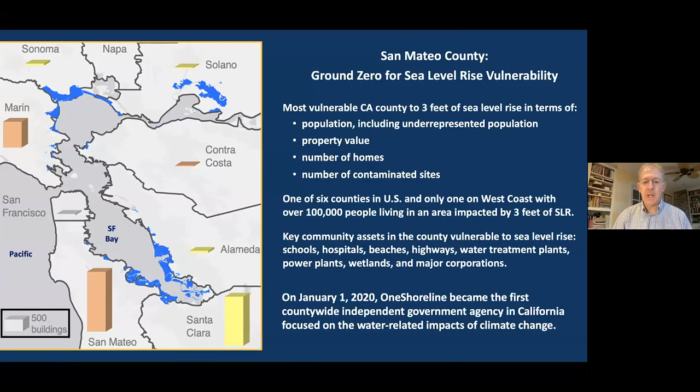I'll point out two specific projects briefly. San Francisco Airport, a major facility, has great vulnerabilities. They've had a project called their Shoreline Protection Project in planning and early design for years. They're now doing their environmental documents, CEQA documents here in California, and NEPA on the national level.

They have an area of their shoreline that they want to tie into the cities to the south and to the north, these yellow dashed lines. That would obviate the need for them to do this long stretch along the airport in terms of creating a perimeter of protection for them.

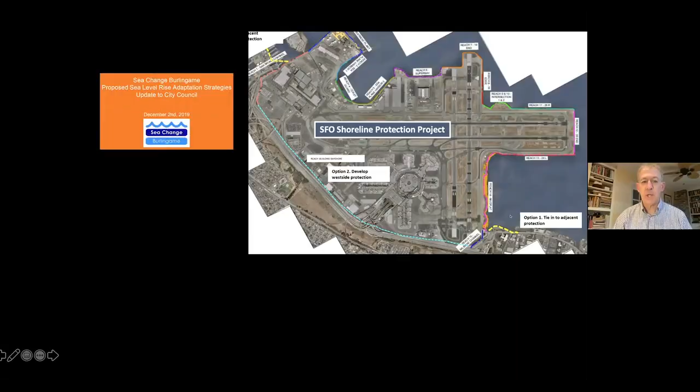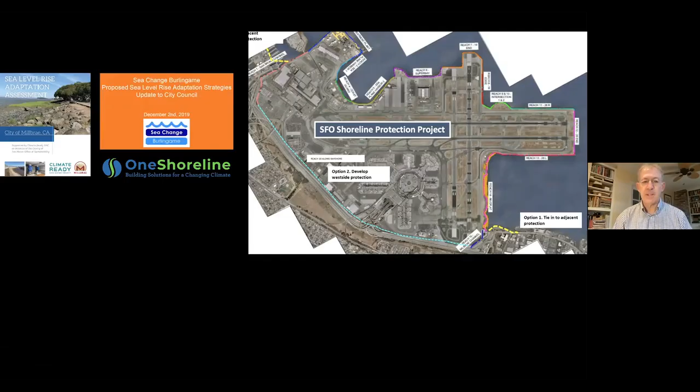Meanwhile, the cities to the south, Burlingame and Millbrae, separately did studies on their sea level rise concerns in late 2019, early 2020. They all came to our new district in January and said we should align our protection so that it's consistent and connected between our entities. That's really why our agency was created.

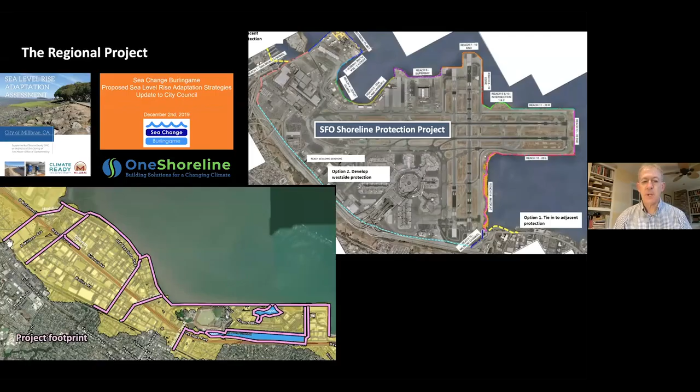So we've established a regional project, not just on the shoreline, but also the creeks that lead into it. Our sea level rise assumption is 6 feet above the 100-year tide, which is equal to 10 feet above today's high tide. So we're taking the long view on this and looking at the areas where the jurisdictions connect.

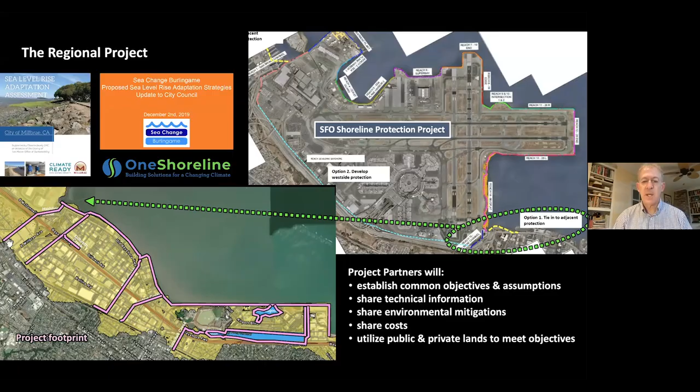The project partners share the assumptions, technical information, environmental mitigation costs, and utilize each other's property jurisdictional rights. We're also looking at the zoning and planning of the cities, and we're working with one of these two cities called Burlingame to put sea level rise for the first time in the San Francisco Bay Area into a zoning ordinance.

That zoning ordinance was discussed Monday night of this week, and it's planned to be approved by the city council in early December. We have six other cities we're working with now, establishing this same program as Burlingame, so that sea level rise is part of their general plans, specific plans, and zoning ordinances. Finally, I want to add there's a project on the coast we're looking at in Pillar Point, and the reason I mention this relates to the next speaker.

Just yesterday, we heard there was a federal interest determination to look at the harbor area along the Pacific coastline. There's a harbor district called the Pillar Point Harbor. They have a couple of harbors, on the bay side and here on the coast side.

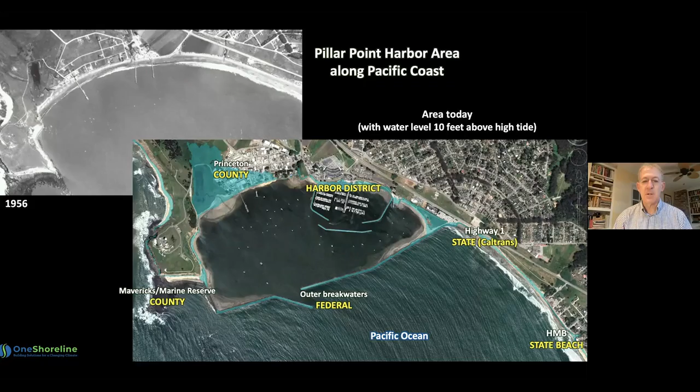There are federal facilities, these breakwaters. There's a county area of homes and businesses. There's State Highway 1, which is a hugely important asset to the area, and there are state beaches. So there's all these different jurisdictions, and our agency is bringing them together to take a long-term view, because each of these different levels, federal, state, county, harbor district, were looking at their own vulnerabilities and not the overall picture and how development over the decades has influenced their vulnerability.

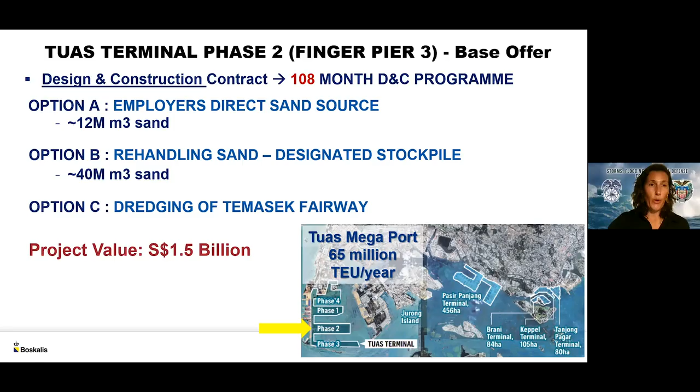It's designed and constructed by three parties in a joint venture, an integrated, fully integrated joint venture: Penta Ocean Construction, a leading Japanese marine infrastructure company, Hyundai Engineering and Construction - many in the States know them for cars, the automobile industry, but their engineering and construction wing is not too shabby either, they're probably one of the leading design and constructors of concrete products internationally - and Boskalis. The caissons are a specialty of Hyundai and Boskalis.

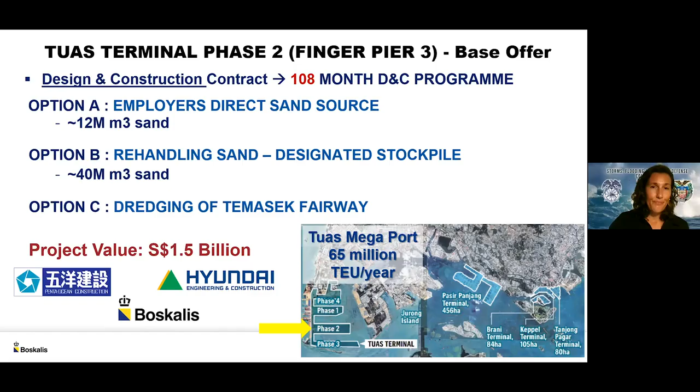So what is this project? It consists of 125 million cubic meters of fill material to reclaim around 366 hectares of new land. What you see here in blue is everything to be dredged, and this dredge material is all used directly as fill for this new land development. The brownish, greenish area is the reclamation area.

This is something slightly larger than Central Park in New York - I think Central Park is around 340 hectares, and this is 366 hectares of new land. The caissons themselves, of which there are 227 to build the 9-kilometer long wharf line, are constructed directly on site in the pink area, the caisson casting yard facility.

We're also building the last stretch of the 2.2 kilometers of the Tuas Boulevard extension, which is the main roadway connecting the different terminals within the megaport. The soil improvement area includes the new land as well as the existing land, so it's around 400 hectares. For reference, that's basically 400 soccer pitches.

There's lots of design and engineering work for this project. It would take me a very long time to go through all of it, but I wanted to focus on a few elements that give a good flavor - not just of the methods we're employing, which are environmentally and socially cutting edge, but also the materials we're utilizing. So basically focusing on this circular building approach, the sustainable building methods, and also the requirements, the design objectives driving this process.

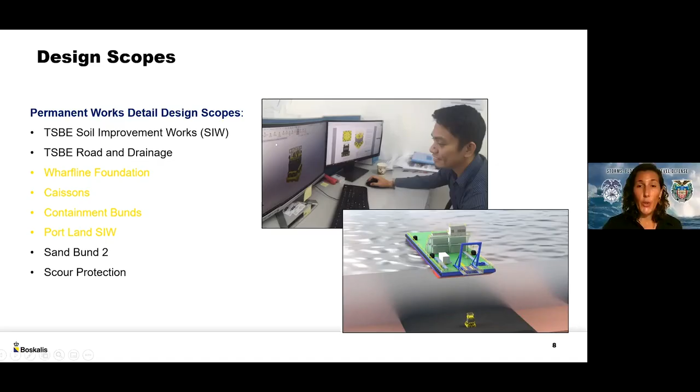I'm going to focus on the wharf line foundation, the caissons, the containment bunds, and the Port Land soil improvement works. Around the 9 kilometers of wharf line, we have a caisson wharf line, but sitting underneath the caissons, we build sand keys. We excavate the existing compressible clays down to competent incompressible clay.

We have a 60-meter wide base at the base of our sand key, and around 1-on-2 slopes going up. Our sand key depths range from 2 meters deep to around 40 meters deep, and then they're backfilled with sand.

To give a reference point, going back to New York, the Metropolitan Museum of Art is the largest art museum in the US. Its footprint is around the size of 8 soccer fields, and it's around 5 stories tall. You could fit 2 of the Metropolitan Museum of Art buildings on top of each other in our deepest sand key comfortably. Our deepest sand key is around 12 stories tall.

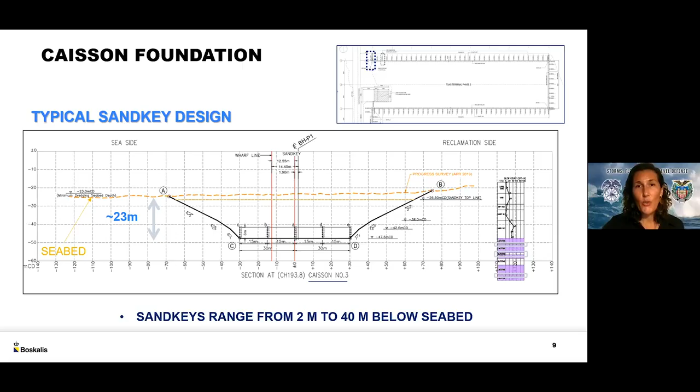This is then backfilled with sand and vibrocompacted to a relative density of 70%. On top of the sand key, we then build a rock mound, which is the direct foundation upon which the caissons are placed to a 10-centimeter accuracy. We then have a heel filter, which is also rock, and then a sand backfill. The active wedge in the sand backfill is also deep compacted using vibrocompaction techniques.

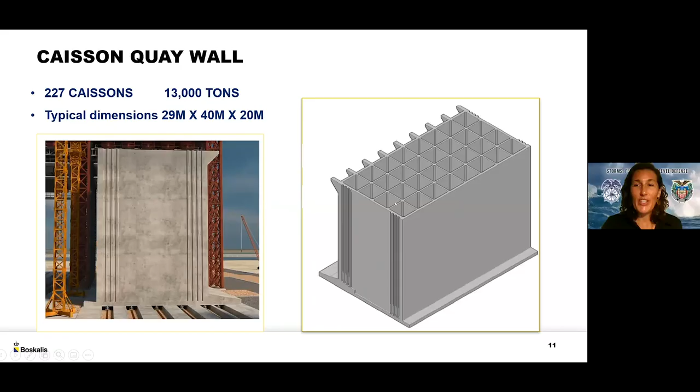The caissons are each around 29 meters tall, 40 meters running along the wharf line, and 20 meters wide at the trunk, and 28 meters wide heel to toe. They're a honeycomb structure on the inside, a pretty typical caisson structure, which we infill with sand that's also deep compacted. Each one is around 13,000 tons when constructed in our caisson casting fabrication yard, using a slip form gantry system, which I'll show you later. It's then filled in with around 17,000 cubic meters of sand.

Along the backbone of the reclamation is the containment bund. This is a multifunctional structure—a sandy bund which extends from the seabed up to +6 meters, the reclamation height of this new land. It's constructed with around 16 million cubic meters of sand, and serves as a backbone for surcharging, for stability of the whole development while we're building it up.

It's also a very large environmental measure, because to the south of the megaport, directly across the Singapore Strait, is Indonesia, and directly to the west is Malaysia. It would be completely inappropriate to have turbid plumes being transported across to Indonesia or Malaysia. By having this containment structure, you can comfortably backfill with clay to the north and west of these bund structures, while you still don't have your key structure in to contain any turbid plumes.

For the stability side, we fill one side up with dredged material and excavated material, and then we surcharge—first the north side, then the same exact thing on the south side. We rehandle all the surcharge material and have a closed material balance, so the remaining sand gets used as fill material in critical areas.

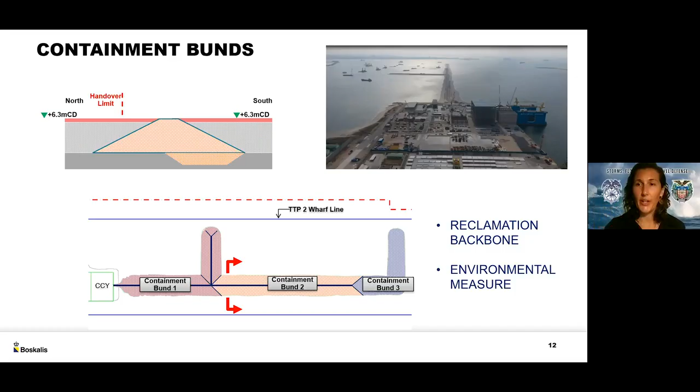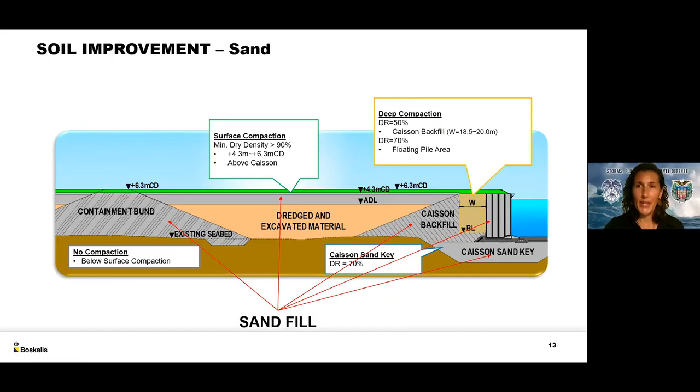So all the sand is in key locations: the containment bund backbone, the backfill behind the caissons, infill in the caissons and the sand key, as well as the cap. And then everything else, anywhere we can, we put in clay—dredged material, excavated material.

We need to soil improve the clay because a lot of it is very weak—a lot of the clay we're putting in here is like yogurt, around 4 kPa, because it's been hydraulically dredged in many places.

For us, which is a really traditional soil improvement technique, we use PVDs—prefabricated vertical drains—which we install down to basically the incompressible soil layer, and up through the sandy cap. Then we surcharge with around 10 meters of sand on top for around 4-month periods, and we flip-flop this sand surcharge around the reclamation to minimize our dependency upon a bulk volume of sand, but maximize the efficacy to reduce our soil improvement period.

So how does this work in the real world? This is all design. Design is lovely and perfect in our engineering drawings, which are stamped accordingly, but we have to build it. So what do we do?

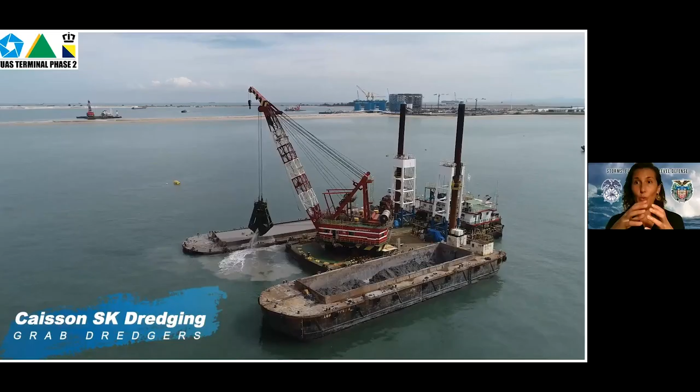We use grab dredgers, but as large a grab dredge as possible. Each one has a grab capacity of around 8 to 12 cubic meters in a single grab, and they can dredge down to 60 meters of water depth. We then fill up the bottom door dumping barges, and this is a direct fill within our reclamation area.

We have the rock mound. We use a fall pipe method where we bring the rock barges alongside, unload them, and the fall pipe places directly into the footprint of the rock mound. We compact it, and upon that we can place our caissons.

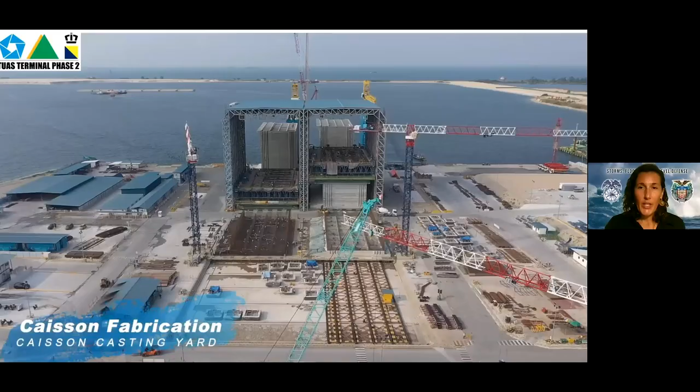This is our caisson casting yard facility. It's a double gantry slip form where we build the foot separately with formwork. Then on hydraulic systems, it shifts into the gantry system, the slip form gantry, and we can construct the remaining 25 meters height of the caisson in around 7 days.

It's then hydraulically shifted out of the slip form and sits there for another 7 days to cure. Then it is hydraulically shifted onto our semi-submersible floating dock, which brings it out into the sea. It submerges, and then we float the caisson out, partially ballasted with water, with a draft of around 19 meters.

We then tow it either directly to its installation location and fully ballast with water first and then sand, or we store it in a temporary floating storage facility on the south side of our area. You can see some of the floating caissons in the background of the image. We have a disconnect point, again, to basically minimize the impact on our logistics chain.

With our clay, as I showed you earlier, we are using our dredging spoils. All the dredge clay from the Temasek Fairway, from the basin, as well as from the sand key dredging, as well as receiving millions of cubic meters of clay from other dredging projects within Singapore and from inland infrastructure projects within Singapore. If it arrives by barge, we tell it specifically the drop point in a 20 meter by 20 meter grid location.

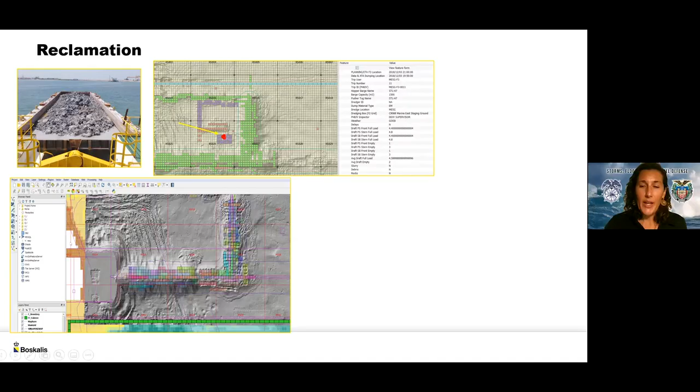So what we do, as I explained before, is have a barge that comes in. We have a 20 meter by 20 meter grid where we track all the fill material. It doesn't matter whether it's rock, clay, or sand, we track it. We then tell the barge master where you need to go to place your load. It then places it, and we have a survey pre and post to confirm the volume.

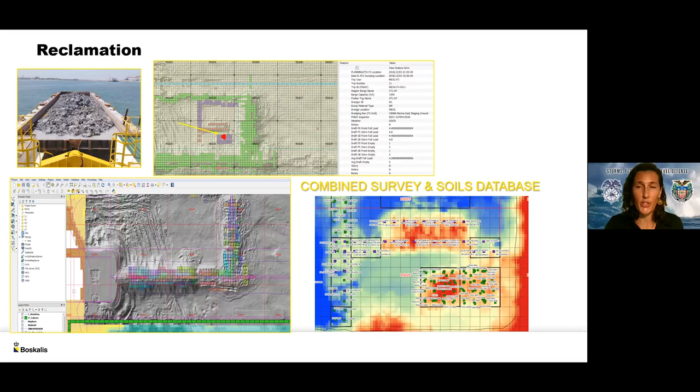Compared to what we measured within the barge and what we can retrack through our survey once it's been placed on the bed. We also survey this over time to determine how it's consolidating, and we utilize in situ measurement methods as well. The key for us is incredibly tight controls on our material volumes, so we have a massive combined survey and soils database used throughout the entire duration of the project.

For the reclamation itself, you can see an image here. The red is the partially constructed containment bund up to 6 meters above mean sea level, chart datum in Singapore. You can see in the image sitting above the red and yellow lumpy layer, and that's the clay fill.

So we build with the stiff clay, we build these intermediate bunds, and we then place the softer clay behind it between the stiff clay bunds and the containment bund to fill it up and track its behavior over time. You can also see the dredged sand key, the deeper blue to the north.

In total, of the 125 million cubic meters of fill material demanded for this reclamation, 32% of it is coming from dredged material and excavated material from other construction projects within Singapore, marine and inland infrastructure projects. And 19% is coming from our own dredging and excavation works within the project.

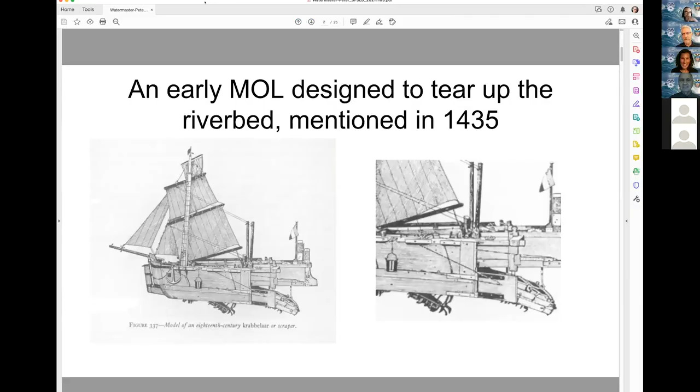So the development, if you could go to the next slide, please. Todd, are you there? Yeah, can you see it? No. Is it 9? What? We're still on 1. Wait a minute, let me figure out what's going on here. What the hell? So you're not seeing the forward slide? We're seeing the first slide. It's not moving forward. Hang on, let me get out of this. All right, there it is. Yeah, that's 3 or 4, if you could go back. I'm gonna go back. Thank you, screen was working. And if you could make me smaller and the slide bigger, that would be helpful. I don't know if that's possible. That should do it. Go ahead.

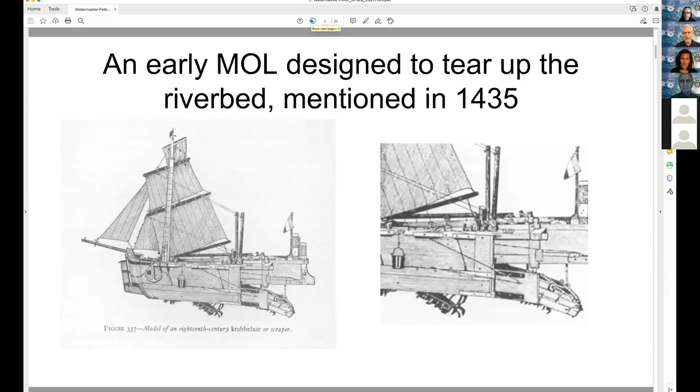So thank you. Dredging really started in Europe with the development of the canal system, which was of great importance, but much dredging was necessary to keep these canals clear. The Dutch were early pioneers in canals and sediment removal. This picture is an early scraper boat called the MOL. In 1435, it's mentioned in the literature. It's rather primitive, you can see the metal scrapers on the bottom. It's simply designed to tear up the riverbed and let the sediment flow. Next slide, please.

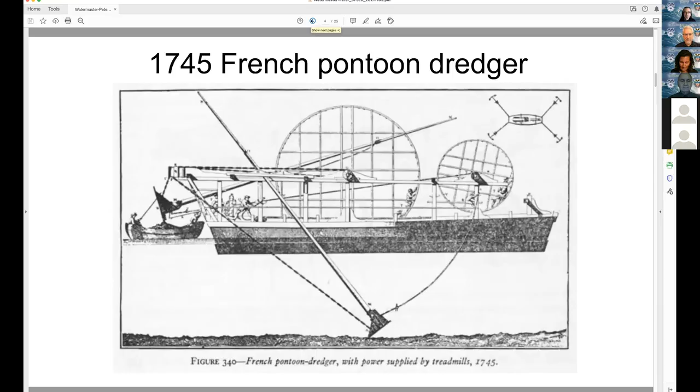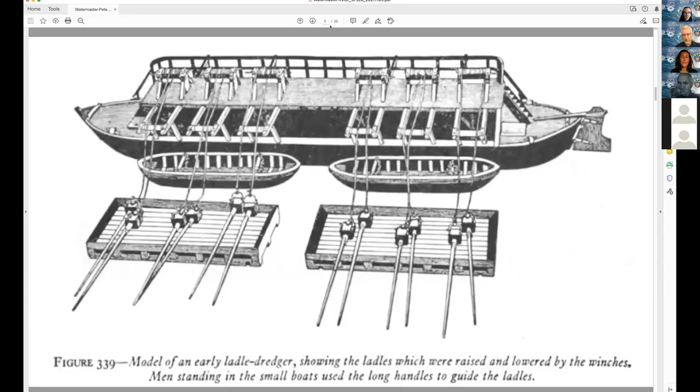Next slide, please. The French developed this pontoon dredger with power supplied by two men who you can just barely see inside each treadmill. It was ingenious but a complex and inefficient method of scooping sediment. Next slide, please. They also developed the ladle dredgers using winches to raise and lower the ladles. This took a lot of manpower, was not very productive.

Next slide, please. Now we come to the topic at hand, which is that flooding of coastal cities has become more frequent with more severe effects from warmer oceans, bigger storms. Billions of dollars are being spent on berms, levees, and deepening of tributaries and channels to try to control the waters. After 600 years of trial and error, we believe we have a significant technological advance for shallow waters up to 20 feet, using some of the methods tried over the centuries.

And Todd, if you could hit the short, let me get back to the video here. Okay, we have a 20-second video intro of what the Watermaster can do.

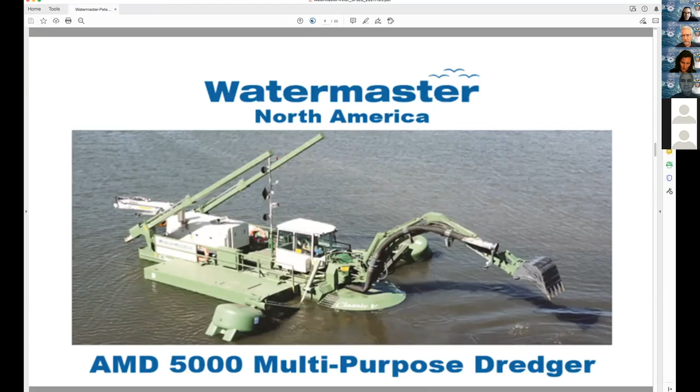So my name is Peter Dreyfus, and with my brother Jonathan, we co-founded Watermaster North America, dedicated to improving waterways to supply clean water in the US and Canada. We are manufacturing and distributing a 36-foot amphibious multi-purpose dredging machine for applications up to 20 feet deep. We are bringing new technology to solve a variety of shoreline and shallow water issues.

Next slide, please. The Watermaster AMD 5000 is a multi-purpose dredger designed in the late 80s in Finland. We are in America now manufacturing the 5th generation of this Jones Act compliant vessel in Michigan.

Equipped with a propeller, this navigable craft has not been available due to the Jones Act, which celebrates its 101st birthday this year and has helped maintain approximately 140 small and medium-sized shipyards around the US. Next slide, please.

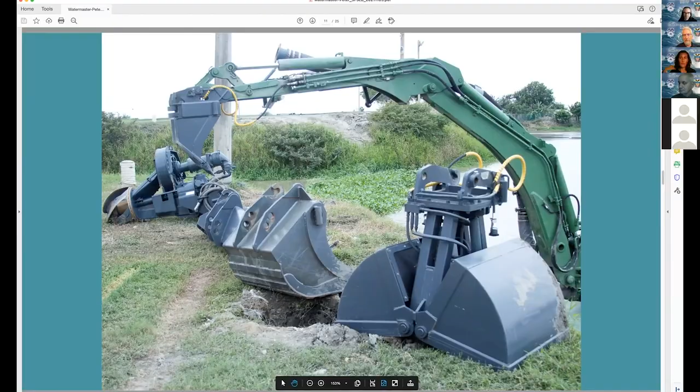Multi-purpose functionality allows one or two operators to use a variety of attachments, much like a Swiss Army knife. Clearing waterways with these tools allows much faster recovery from potential flooding, whether from high tides or storm events.

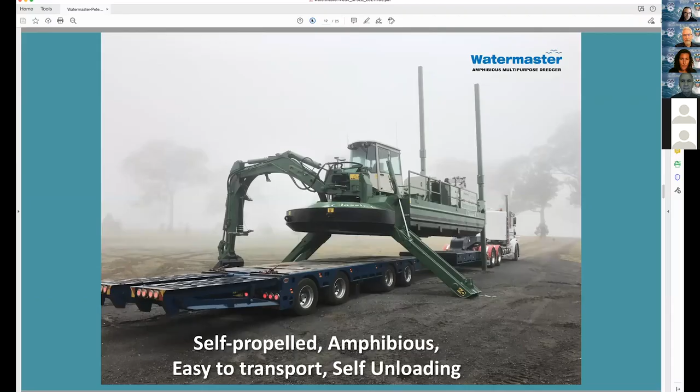Next slide. This machine is amphibious, as you saw in that little video, in the sense that it can be trailered to a riverbank, raise itself on hydraulic spuds, and then walk into the water.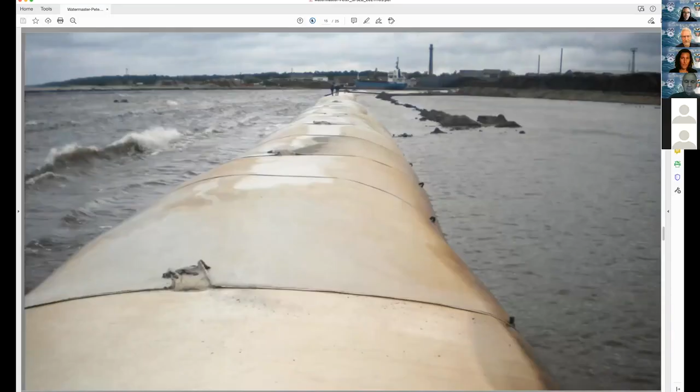Next. A German company, Huesker, has been installing massive polymer tubes to be pumped full of sediment and protect shorelines. You also have heard of Geotube, and there are a couple of other brands, but this is an effective, relatively cheap and quick solution rather than building very complicated engineering seawalls.

Next slide. I don't know if you can really see this, but in the upper right, you can see there's a cross section of a beach erosion project. It's called SoilTain Tubes by Huesker.

It's proven successful in multiple locations for coastal protection. With a covering of rock and sediment, these barriers have a claimed life expectancy of 50 to 80 years with quick and economical installation.

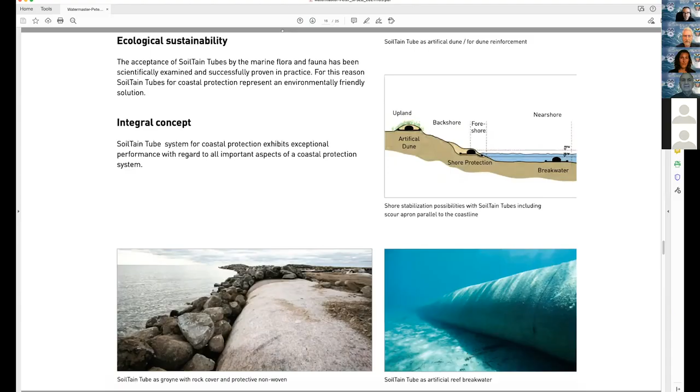Next. With a variety of attachment tools, the AMD 5000 can function in many ways as a dredger for canal clearance, a marina builder, beach restorer, icebreaker, and renewing tailing ponds for mining operations.

Next. Standard excavating with a toothed bucket into a barge will go down 20 feet.

Next. Invasive species such as hyacinths are clogging waterways around the world. Using less manpower and fewer trucks, tugs, and cranes, the Watermaster produces more work with much less expense.

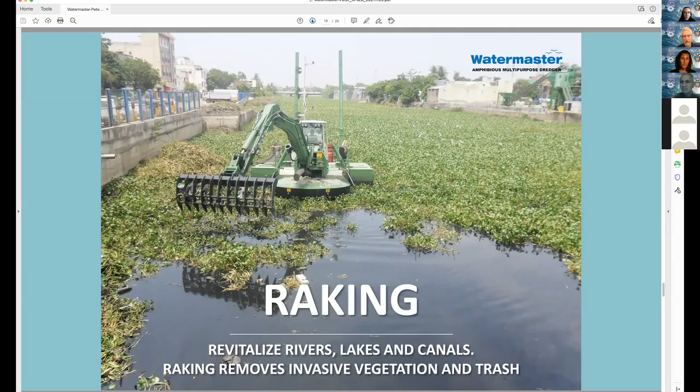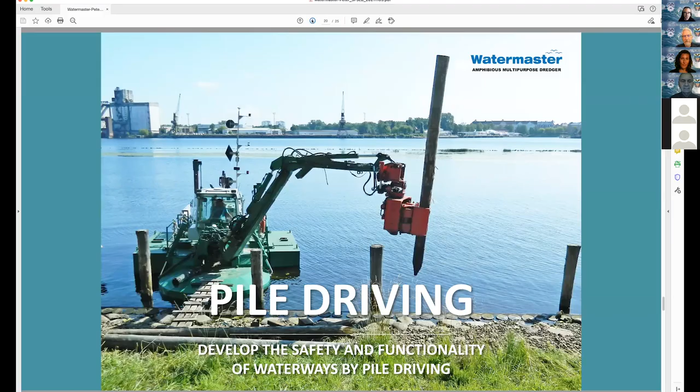Next. The Watermaster can build marinas by pile driving, as well as installing interlocking sheet steel riverbanks with the vibrating Movax attachment. Next. Using a Caterpillar Tier 4 engine and globally available parts such as Bosch, Rexroth, and Parker Hannifin, the AMD 5000 is designed to be easy to service and maintain.

Next. Marinas are easy to clear with bucket or suction dredging, where the sediment can be pumped almost a mile away without a booster pump in a 10-inch pipe.

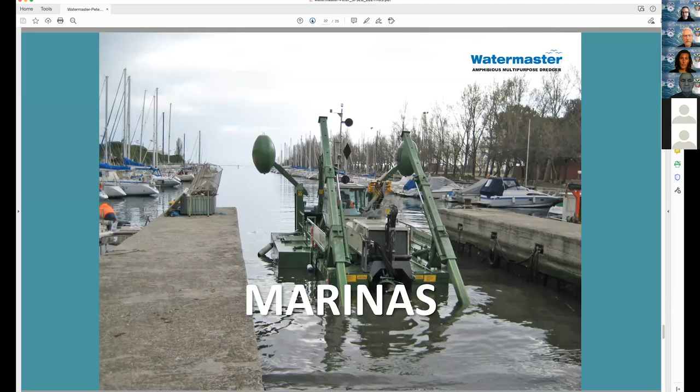We are working on different aspects of beneficial reuse of the yield, including separator tanks of gravel, sand, and fines, as well as recycling the sediments of gravel pits around the country.

Next slide. Clearing and deepening canals and rivers from the shoreline out will help move more tidal and rainwater to prevent flooding. Placing sediment over marsh and wetlands will keep those areas from going underwater due to sea level rise.

Next. Watermaster North America has 2 offices, mine here in Oakland, California, and the other team members in Ann Arbor, Michigan. Next, please visit our website, watermasterna.com, to see the Watermaster in a longer video, and it's much more exciting with great music. Let me know if there are any questions, and thank you for your time.

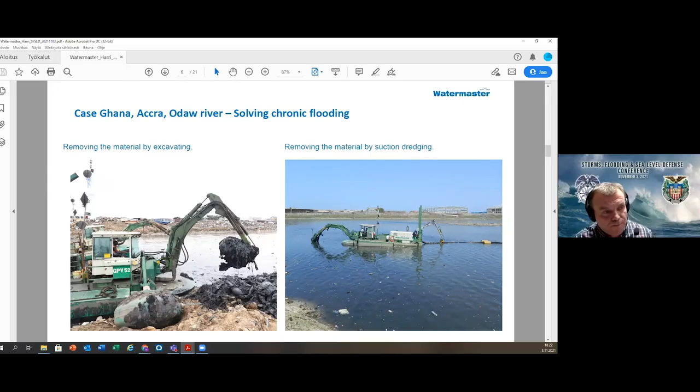And then there's also sedimentation, and together these are causing flooding during the rainy season. To solve this issue, one big contracting company procured a total of 4 Watermasters to solve the flooding issue. First, by excavating the harder, heavier, rougher material from the river bottom, they opened the area, and then it was deepened by suction dredging to increase the volume of the river. This is how the same river looks after the dredging work was done - a very dramatic difference.

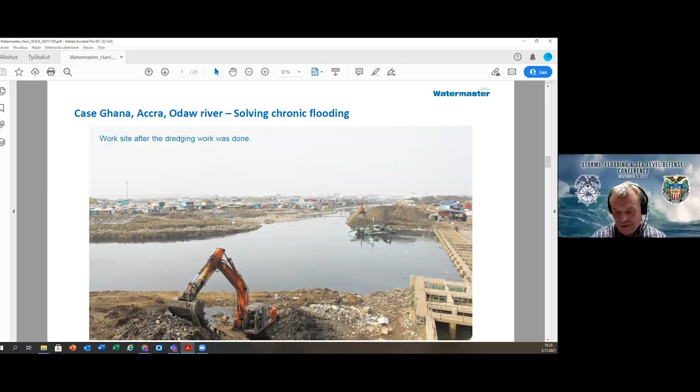The reason why the government took action was that in 2015 there was very heavy flooding after 3 days of raining, and the river couldn't tolerate that amount of water, causing a lot of damage to properties, and 120 people died. So then they applied a solution with Watermaster, and from 2016 to 2018, over 1,250,000 cubic yards of silt and rubbish was removed, and the estimate was that 2.5 million people benefited from this non-flooding solution. The situation is now better, but because people are still throwing trash into the river and siltation keeps coming, continuous maintenance dredging is still required.

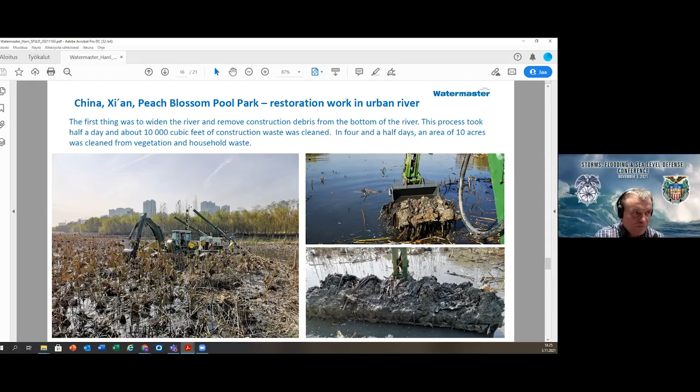This is a river restoration project where the area must first be cleared. Harder material, some construction debris and everything on the bottom, was excavated out. Then by rake, removing vegetation, deepening the area by suction dredging and pumping the material through the pipeline to the dewatering tubes, where it was encapsulated. After everything settled down, it was covered with soil and used for gardening and landscaping, creating a very nice amusement park.

Here you can see this area before and after the dredging. Very nice. And all of this was done by one Watermaster in 20 days.

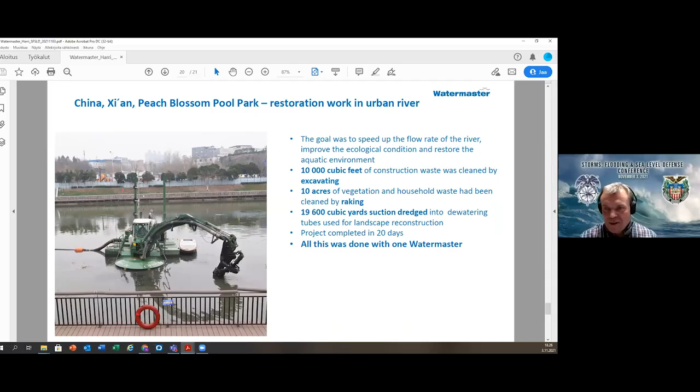So that's the big benefit of our machine: you can do multiple tasks with one machine, which reduces your investment, running cost, service and maintenance cost, and you get very profitable results with less money.

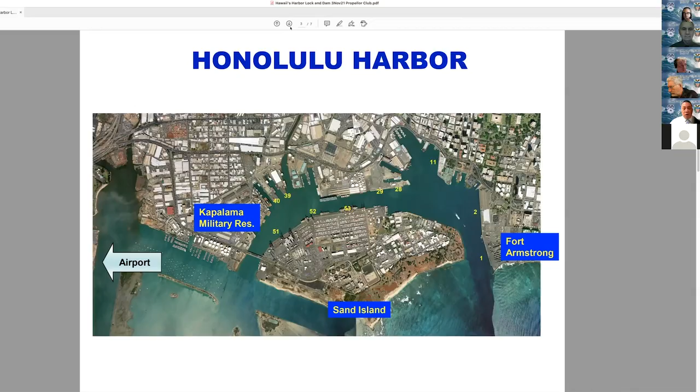I want to point out the configuration of our harbor. The original harbor was built by the early inhabitants for recreation, fishing, and other commerce activities. The island you see in the middle is a man-made island constructed by the Corps of Engineers when the harbor, as configured today, was built. The configuration and geometry of this harbor is going to be very important to us in what we do in the future.

So these two slides show—excuse me, my dog's chewing on his toy in the back.

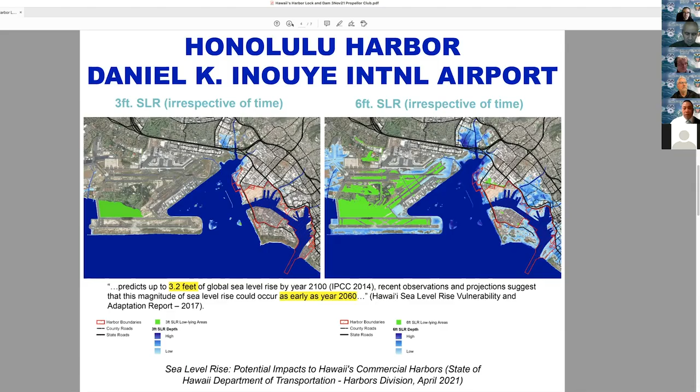Once we determine there's some kind of repair or maintenance needed, we need to get a contractor underneath as well. With sea level rising, we're going to have a difficult time getting under it to do maintenance and repairs. Not only that, we're going to have difficulty keeping our operational areas from being inundated by water.

Next slide, please. This is actually my last slide, and maybe one I'll spend a little more time on. It's a culmination of the ideas and thoughts by my engineers and planners on how we're going to deal with a bunch of problems we have here at the harbor.

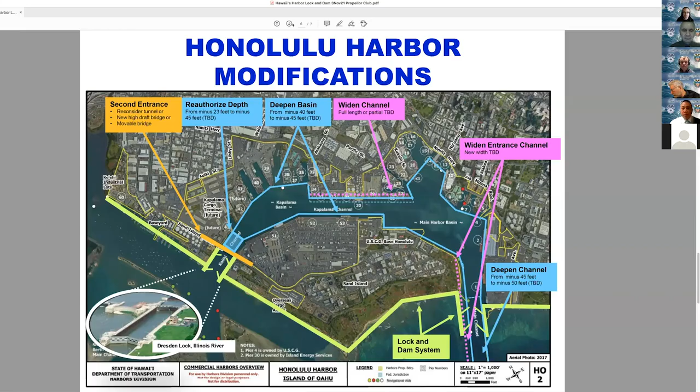So I guess the last thing I would say about this is, what we're learning, whether it's working with the Corps of Engineers or working with the other adjacent landowners, is partnership. We obviously can't do this on our own. There's many other folks that are going to be affected by what we do, including environmental folks. And so we really need to work on improving our partnerships with everyone that's going to be affected by this project. And Stas, pending any questions, that concludes my presentation.

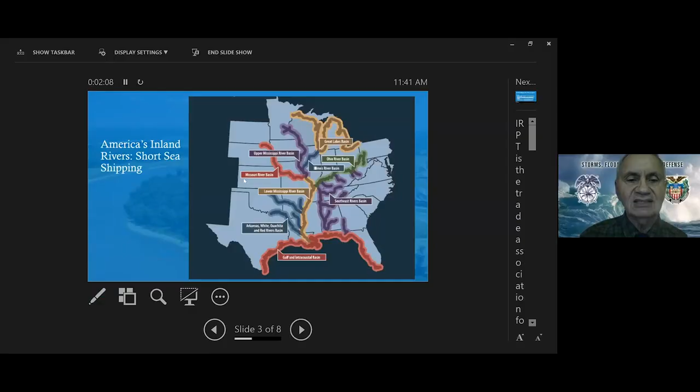When I talk about the river transportation system, it's important to note this is the map here with color-coded rivers. Of course, we have the Mississippi, the largest. We do cut the Mississippi right around St. Louis, and then we say the upper Miss and the lower Miss. Of course, we have the Ohio, the Illinois, Missouri. I'm not going to read all of these to you, but every single river plays an important, crucial, and vital role to the U.S. supply chain for transportation on all modes.

So I want to say, the unpopular opinion is that this is not new. Sea level rise, floods, and surge, it's not new. What is new is the way that our policymakers have made decisions, whether it's to operate and maintain that system, or the lawmakers who are deciding to fund the operation and maintenance of that system.

Each year, usually around springtime, our rivers, shown here on this map, will experience some snow melt out of the north, thus causing a spring level rise. Unfortunately, in some years, what also happens is at the same time we may have some heavy rain systems that come through that also add to that already snow melt. So you may have a 30-foot swing in the level of that river from one week to the next. We've been experiencing this for many, many years. It's the way the system has been operated and maintained, the decisions based on those policymakers that affect or impact our system's ability to absorb the water.

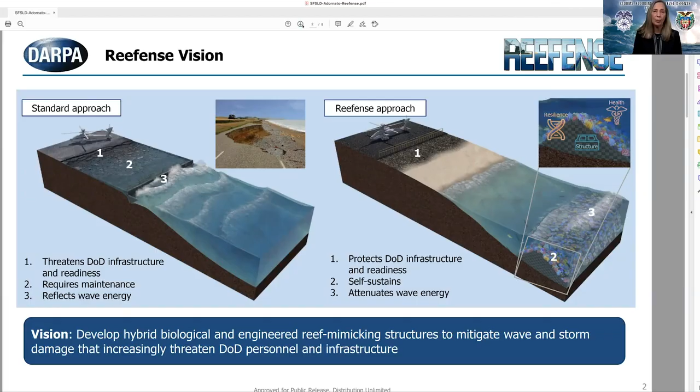These organisms will settle and grow on the base structure and increase its height and complexity over time. We're focusing on oysters and corals because they deposit the calcium carbonate shells and skeletons that accumulate and help keep pace with sea level rise.

Sea level rise and wave-induced flooding threaten the sustainability of more than 1,700 Department of Defense managed installations in coastal areas worldwide, as well as the communities that surround them.

Some notable examples of events that have caused damage to bases, or when DoD personnel had to respond to disasters, include Hurricane Sandy, which caused the DoD to mobilize a total of 24,000 personnel for infrastructure repair, debris removal, and power restoration, among other services. Hurricane Florence, which severely damaged Camp Lejeune, and Category 5 Hurricane Michael, and Tyndall Air Force Base is still recovering from damage caused by that storm.

During our program, we have 3 technical areas where performer teams will focus their attention to develop their approaches for sustainable coastal protection.

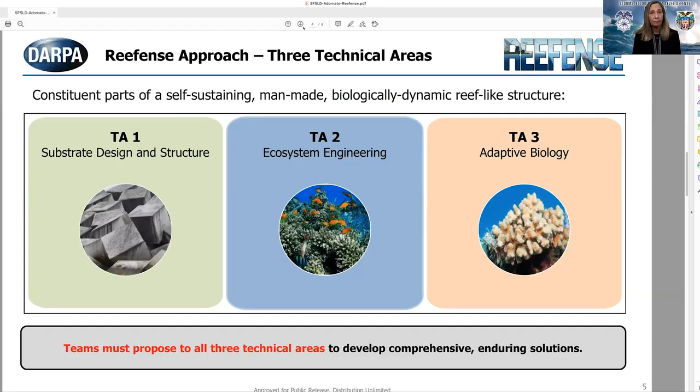These technical areas are substrate design and structure, ecosystem engineering, and adaptive biology. We believe that the Reefense vision must combine technologies from all 3 technical areas, which we call TAs, to succeed. They include an attenuating structural system, that's TA1, a way to maintain that system, which is TA2, and future resilience for that system, which is TA3. Each of these technical areas requires world-class innovation.

The first TA focuses on the structural components, which will involve novel solutions in material science, structural design, and hydrodynamic modeling. Some of the considerations for this area are, first, materials. They should promote the growth of reef organisms and also be structurally sound.

The second is a macrostructure, which examines how the large base structure is designed and arranged to attenuate wave energy. The third is microstructure, and this looks at how the surface of the structure is designed to enhance oyster or coral settlement. The fourth is modeling and wave tank testing.

This is going to help us predict how the design will operate and achieve the wave attenuation metrics and affect local circulation when these are actually installed in the field. And lastly, the techno-economics: this estimates what it will cost to produce and install this structure and how the cost of maintenance will compare with that for standard approaches.

So by the end of the program, we would like for our outcomes to be competitive with existing engineered solutions to help with the transition.

The second technical area focuses on bringing together the supporting keystone organisms needed to maintain the health of the reef builders by promoting settlement, reducing competition for substrate, and balancing predation. This includes the fish and invertebrates that prey on the organisms that consume oysters and corals, as well as bringing in the herbivores that prevent the algae overgrowth that smothers and degrades both coral and oyster reefs.

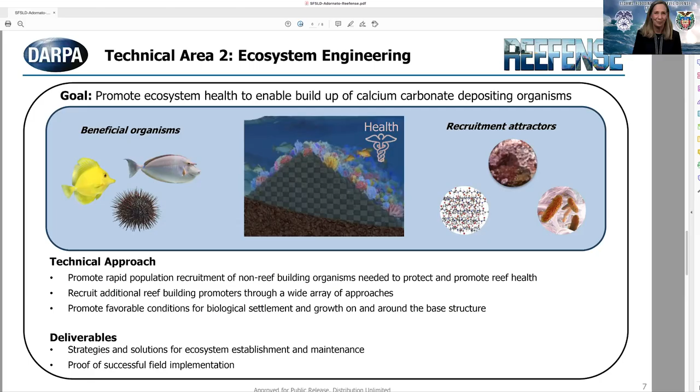The third technical area focuses on adaptive biology for corals and oysters with a view to improving long-term resilience. It's well known that rising sea surface temperature and increasing episodes of disease and pollution pose serious threats to reef builders. I'm sure you've all heard about that.

The TA3 techniques for Reefense will focus on adaptive breeding and other approaches that can be permitted for in situ testing. New adaptive biological strategies for corals, their endosymbionts, and oysters will be necessary to ensure robust reef growth.

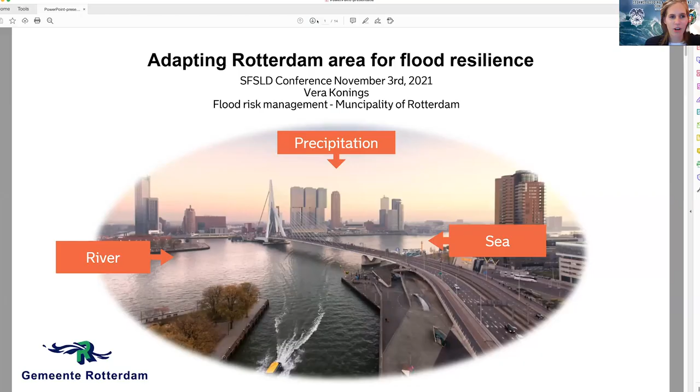This is a picture of Rotterdam. Rotterdam is situated in the Netherlands, and we have a lot of water in our city coming from the river, from the precipitation, and also from the sea.

My presentation will first go into a short introduction to the city of Rotterdam. Second, I'll go into our regional strategy on how to deal with sea level rise. And I will end with how the port is currently working on their adaptation strategies. That is also a topic which has been presented the last two years on this conference by a colleague I work a lot with, Joost de Nooijer.

So these are some pictures of our city, Rotterdam. We are a delta city with relatively small flooding along the river banks, as you can see in the picture. We have about 600,000 inhabitants, making us the second largest city of our country, and we have the largest port of Europe, also situated along the outer river banks.

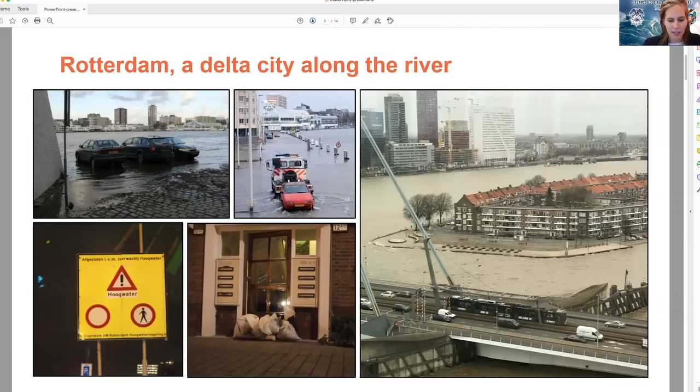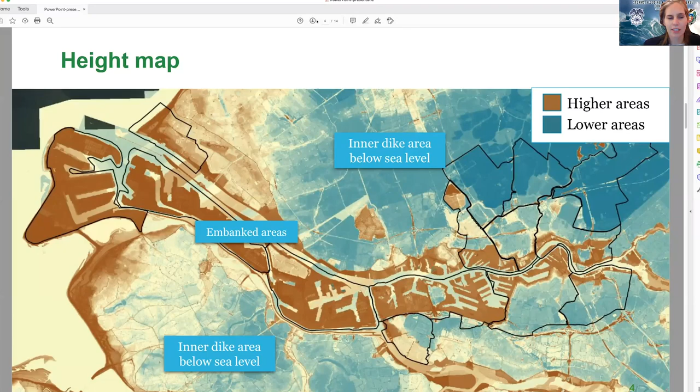All the areas below sea level, the blue areas, are protected by a large system of dikes. The city is mostly situated on the right part of this picture, and the harbor is mostly situated along those higher banked areas on the left side.

As I already said, we protect that low-lying area with a huge system of big dikes. Those dikes have a probability of failure between once in 1,000 years to once in 100,000 years. Since 2017, we have a whole new flood risk management approach in our country, which defines these levee standards, as we call them. As you can see, all those outer dike areas, the higher brownish parts on the picture before, are not protected by the dikes — that's also less needed because they are much higher.

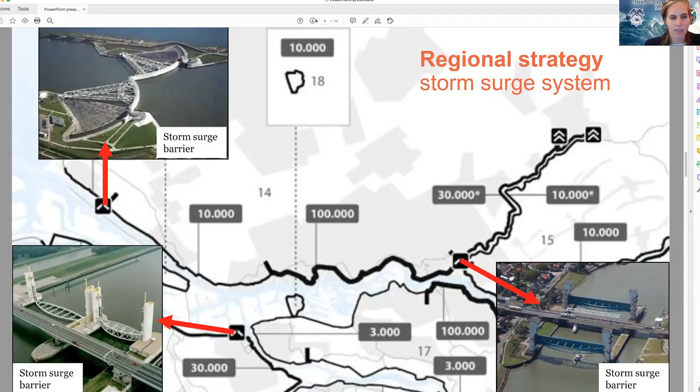Besides the levee system, we additionally have a storm surge system with three storm surge barriers, which can close off the area when we expect very high storm surges from the sea.

As you can also already conclude, flood risk management is of vital importance for us because we are situated in this delta and quite low-lying, and it's getting only more and more important due to climate change. The probability of a flood increases in the future due to sea level rise, but also due to soil subsidence, because we have a lot of soft soils with clays and peat. Secondly, we also have a lot of new developments increasing the consequences of a flood — a growing number of inhabitants, a booming city, and more business and new port activities.

With our regional strategy, as I shortly introduced, we can cope well with sea level rise of about 3 feet. But if we have more than 1 meter or 3 feet of sea level rise, we have to think of new systems. We are currently, as a country, exploring other possible futures than the strategy we have today. This is led by the ministry, with a lot of cooperation from our knowledge institutes.

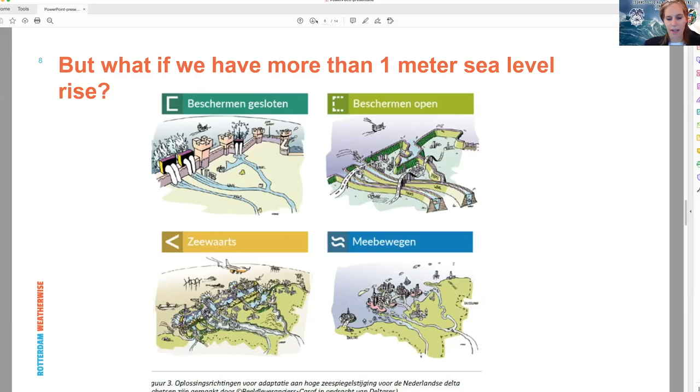With that study, we are exploring 4 extreme future scenarios for our delta, which you can see in this picture. The first researches a system of full protection with dams and high levees. The second, right above, is a closed open system with storm surge barriers, a bit comparable to what we already have today. The yellow one, left below, says we can expand towards the sea and strengthen the shore. And the fourth is mostly the most adapting scenario. We are just studying these scenarios, but we can also think back about what we can do today given the 4 scenarios.

Now I'll go back to our regional strategy, what I have already introduced before, with our storm surge system and our system of levees. I will shortly share with you some details about that.

The first is the way how we work together in developing and executing this strategy. We embrace this strategy with all the involved stakeholders, like the ministry, the Port of Rotterdam, the water boards, bigger municipalities, safety regions, the province, and so on. Together, each party has its own actions to execute this strategy as well.

The second thing I would like to share with you is a little bit about the details of the three-layer approach within this strategy. The first is the defense, our basic layer, which is the storm surge barriers and the levees. Secondly, we are also more and more rethinking spatial planning - how do we build behind the levees or in the outer dike areas? And the third is the crisis management.

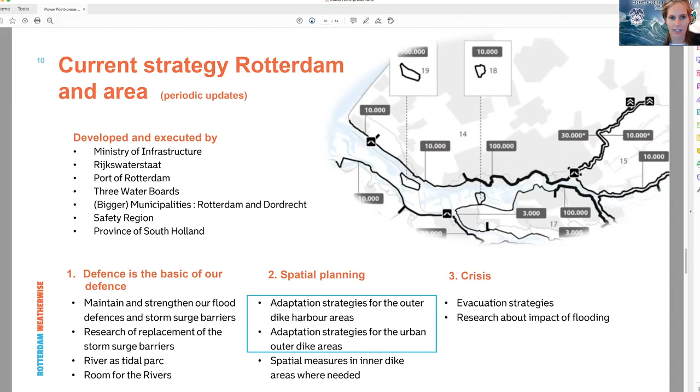I will zoom into the adaptation strategies for the outer dike harbor areas and the adaptation strategies for the urban outer dike areas. I'll go into these because, as I already told you, the adaptation strategies for the harbor areas were already introduced to this group over the last 2 years. I will give a short update about that, and I will also tell something about how the city is working on the adaptation strategies for the urban outer dike areas.

So what I already told you, the port strategies are completed, as presented also earlier in this group. The last strategy was the Maasvlakte. Currently, the Port of Rotterdam is working on an integral strategy for all separate areas, but flood risk management is now completely embedded in the Port of Rotterdam project management methods. The next steps really focus on external communication about the strategies, sharing information, and implementation of flood risk management in each project and design philosophy of also the companies in the harbor - so really going to the implementation.

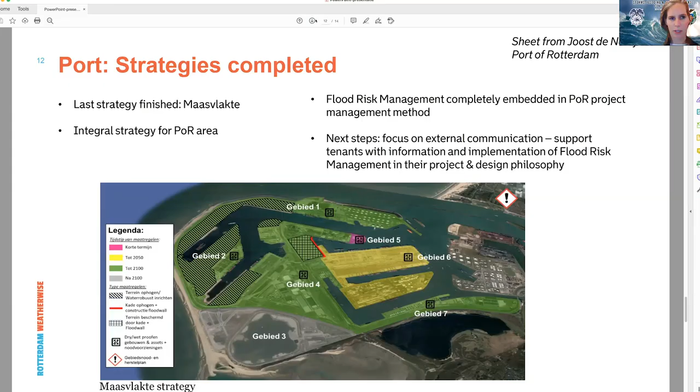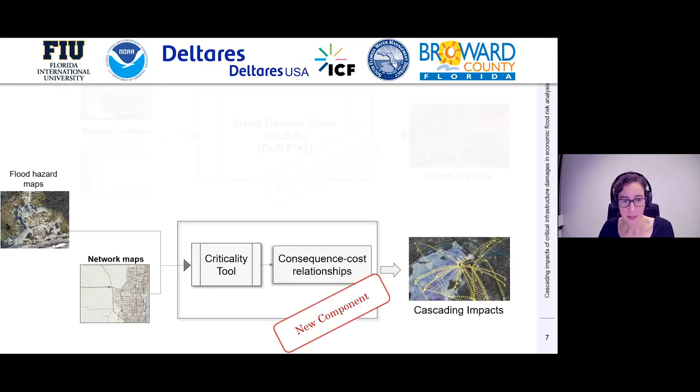So this is our framework. I don't have time to walk you through it, so I'm just going to pull out a couple of interesting features and give you some resources. We just did a webinar on this before this conference, and it's all in detail there, so I put the link if you want to watch it. It was recorded and really takes you through this whole framework and the outputs in a much more comprehensive way. But some things I want to pull out.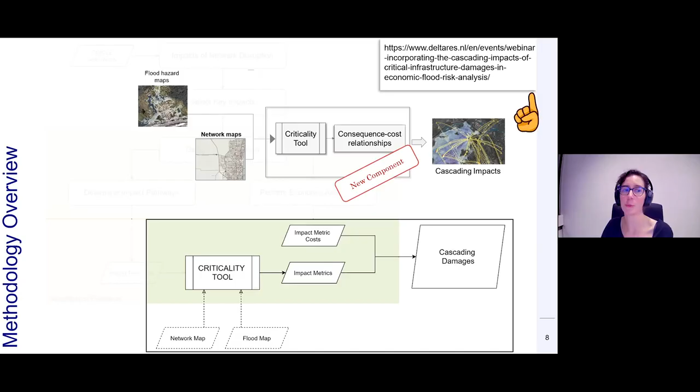I'm drawing your attention to a certain part of the framework to show that we did achieve what we wanted, which is to develop a tool you can use to do this workflow with the flood maps and network maps to quantify these cascading impacts.

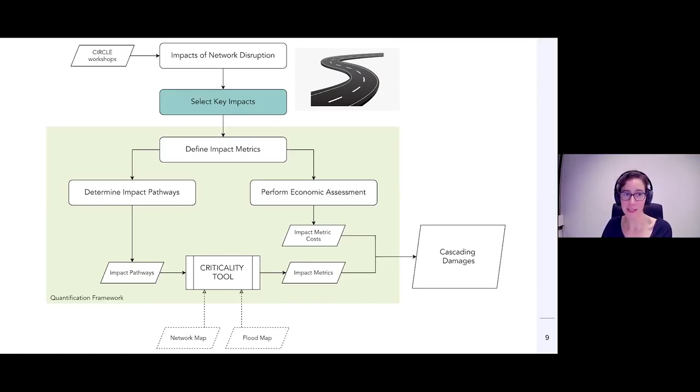I want to highlight what we looked at in our application in Broward County. We looked at the road network - that was the network we chose. We looked at how flooding impacts four sectors: reduced hospital access of residents because of flooded roads, business interruption because of flooded roads, airport-related tourism losses due to lack of access to the airport, and port interruption. This is due to lack of access, flooding of the access roads to the port, not the port flooding itself.

So the other things I want to point out are some tools that might be interesting to you. At the top - I hope you don't see what I see on my screen, which is all this Zoom stuff - let me know if you don't see it, but up here it says Circle Workshops. The first thing is really looking at a wide array of network disruption impacts. I wanted to draw your attention to this Circle tool because it's free, it's online, and it's really great.

What it does is allow you to organize and visualize information about critical infrastructure together with a lot of different critical infrastructure operators. So you can get people from electricity, from the port, from water and sewer, all these people together to talk about their own vulnerability, but also how they're dependent on each other. It's just a fantastic platform to do that. These are some pictures from when we did that a few years ago in Broward County, and we reported on that - there's a paper about it if you want to look.

The other thing I want to pull out of this framework is another tool. A really central component of the framework is called the criticality tool. This tool is for modeling networks - in our case it was the road network, but it's basically a really flexible model based on graph theory. It's got two algorithms in it that make it really great to assess critical infrastructure cascades. I'm going to go explain these in a second. One we call find nearest location, and the other is called find isolated locations.

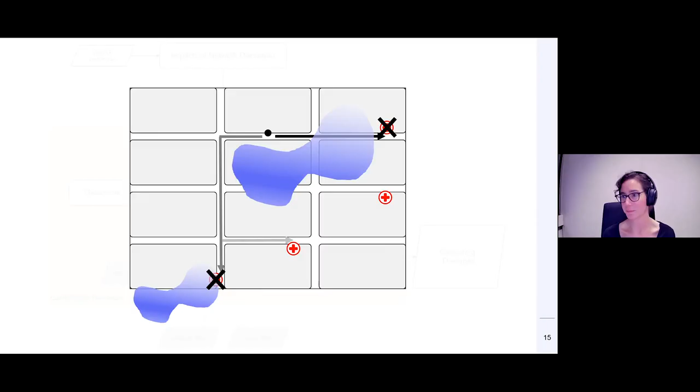That can be actually very expensive if you take into account the risk of mortality by having delayed medical care.

And of course, it knows the costs associated because it knows the daily revenue of these different business types. So you can kind of estimate your impacts for businesses that way.

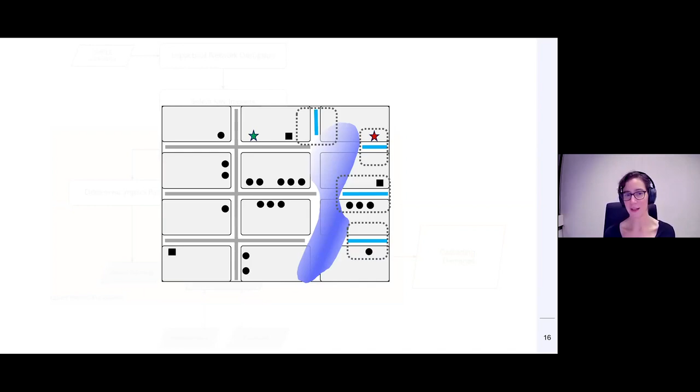And for critical facilities like the port and the airport, you want to identify where they are in the network. There's this green star in a connected part of the network, and you see this red star show up in an isolated part of the network where most of the community can't access it, so that would be considered inaccessible. These are kind of the features of the tool that make it really well suited for quantifying these cascading impacts.

What I want to do, just to keep it short, is hop over to a website. We built an ArcGIS story map. I don't know if you're all familiar with that, but I'm a huge fan. It's like a website, but it's got great GIS features where you can put in interactive maps and have it tell a story by zooming into the important features. So we made one of these, and I just wanted to demo it for you for a second.

I have to move these controls. Oh, that's better. And so you can see it here. This is the website in the slides, so you can find that. I already pre-loaded some views because you know how things go when you're live. But for now, these are kind of the sections, the methodology.

I just want to show you this framework that I didn't tell you about due to the time constraint. It actually walks you through here each of the steps, so you can see them start to highlight, and as you scroll, it's telling you about each of these components. So I really encourage you, if you're interested in how we did this, to go ahead and peruse this story map. That's the methodology section.

There's also another section which I preloaded so we wouldn't have to have any chance of it not loading quickly. That's this 2017, 2060 events. You can kind of see some spatial information that comes out of this, showing you road disruption for different events. And I thought I'd just walk you through one example of the reduced hospital access so you can see what kind of information we're getting out of this.

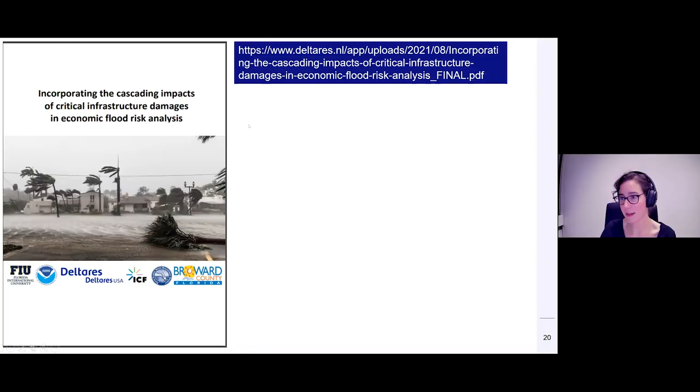So let me just zoom back. I just want to show you that this link is here, so I do encourage you, if you're interested, to take a look. The other thing I wanted to let you know is that there is a report documenting all of the details, and that's also online. You can follow this link and it'll take you to the PDF of the report where you can find all of the details. So I hope I stayed in my time, Stas.

This is, Catherine, you've done a really good job here. This is a very innovative concept, I think, for emergency services people. It's very, very important. The deployment of the criticality tool was a little bit above my pay grade.

I think I kind of followed the use of the algorithms, very interesting. A quick question: in an emergency, how does anybody figure out how to get to the right hospital or the right fire station, or do the ports have access to be able to advise truck drivers on how to get in and out of the ports?

Yeah, that's a good question. I'm not sure for the ports. I think for hospitals, usually, I guess the ambulance drivers are aware. To be honest, I'm not sure in an emergency.

So this is something we really want to expand the application for. This was for planning purposes, but we think there's a huge application for response and emergency management. We're really interested in finding out how people right now figure out which roads are out, how the ambulance drivers know, and how that communication line works. We're interested in following up about that and seeing how this tool, which is very fast because it's a graph-based tool,

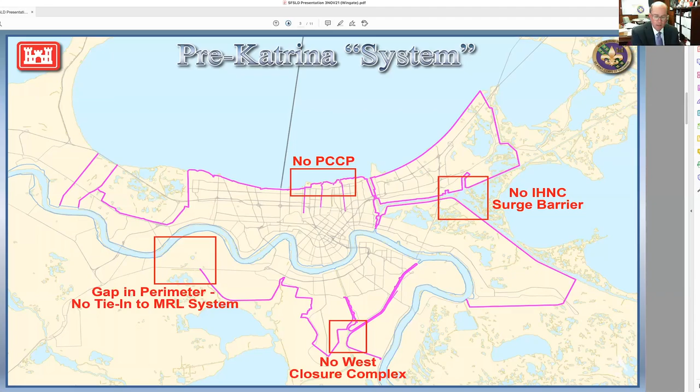When the nation made a commitment, it resulted in the Hurricane Storm Damage Risk Reduction System. This was not a New Orleans event with respect to Hurricane Ida, which occurred about 60 days ago. All the gaps have now been closed - we fully have a system, not just in name but in performance. This was a fully funded program at nearly $14.6 billion, resulting in a system-wide approach with resiliency.

At the very bottom of the slide, we don't allow water to get into the West Bank - again, keeping the enemy at bay. That was over $1 billion for the West Closure Complex, the largest drainage pump station in the world, which was actually an early contractor involvement project.

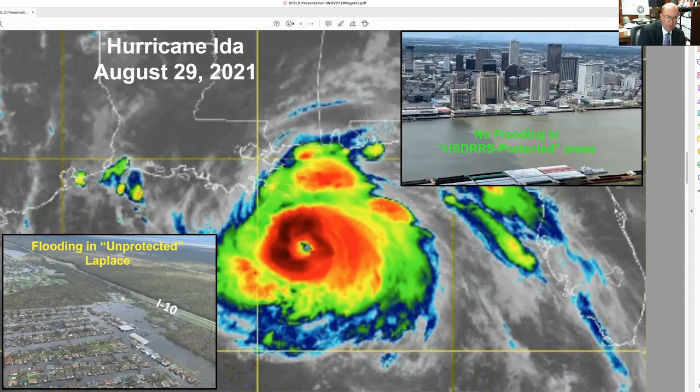So what happened when Ida hit? Looking at the top right slide, that is New Orleans - not one drop of water got into New Orleans as a result of surge. The levees held, had plenty of freeboard, and the system worked as designed. Looking at the bottom left of the slide, that is an area without a federal system in place, and you can see the results - surge got entirely into that community, about 30 miles west of New Orleans.

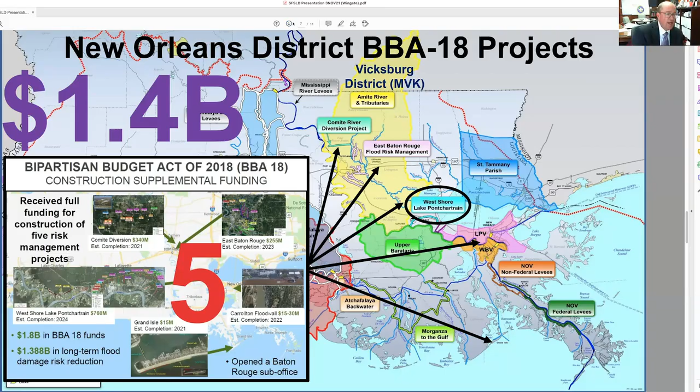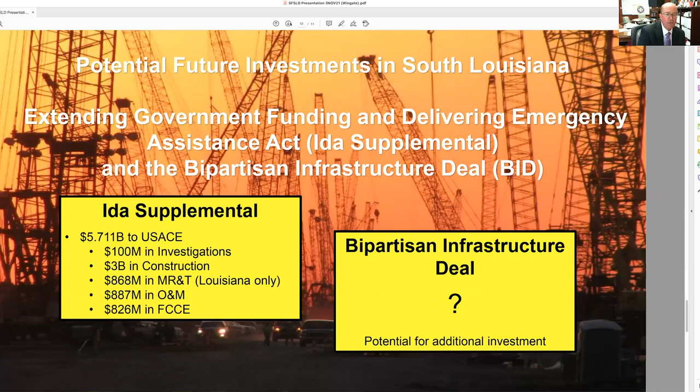So next slide, please. So where are these monies going to come from? Well, we're very hopeful in two buckets, if you will, right now. Congress just passed the Hurricane Ida supplemental. You can see there $5.7 billion to the Corps of Engineers. That's going to heavily look at four states, and Louisiana is one of those. So I'm very encouraged and hopeful that we'll receive additional money as a result of the Ida supplemental, as well as the pending infrastructure deal that we're all watching closely, that we think will be competitive as well.